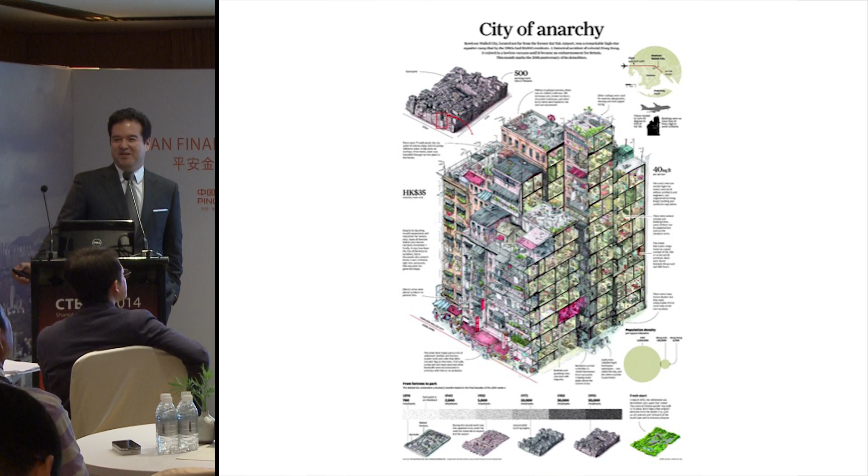This is the Kowloon Walled City, if any of you are familiar with it. It actually existed. It's been demolished, but it's the densest human habitation in history. It's 2 square meters per person. Thomas talked about some of the reasons why Ping An decided to build the tower here.

So if we think about a traditional city like New York, we define things by pedestrian proximity. It takes 15 minutes to walk from the Empire State Building to the Chrysler Building. Now, with high-speed transportation, it takes us 15 minutes to go from ICC in Hong Kong to Ping An Financial Center in Shenzhen. So it begins to redefine our understanding of proximity. Ping An and the chairman Ma Mingzhe essentially saw this tower as an extension of Hong Kong's central business district.

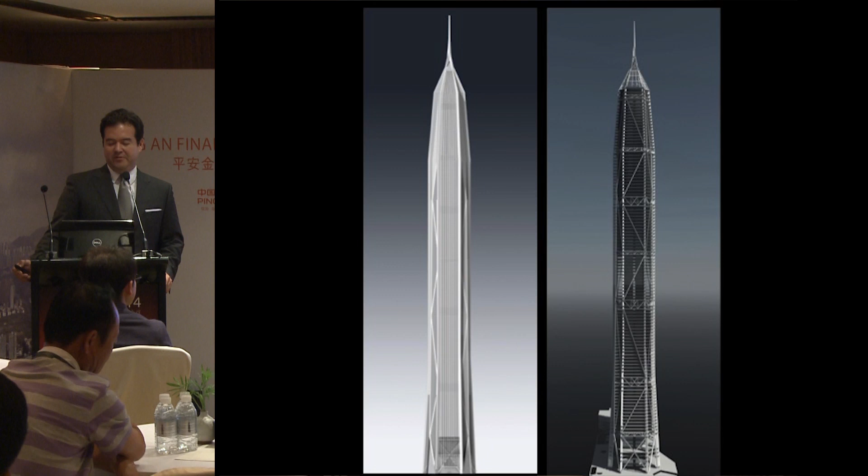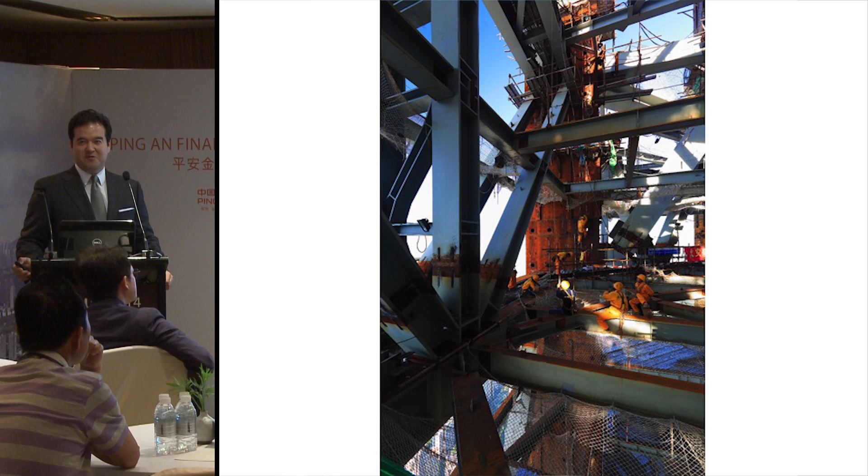Now, getting into how we do it. Structure plays a huge role when you do a tower like this. You can see commonalities already in the design of the structure with other super tall towers. I put these images side by side because the design of the exterior and the structure, and the interior as in the core, need to occur simultaneously. And here you can see it coming up. And just to give an appreciation of the scale of these structural elements, we begin to inhabit this great infrastructure.

I started talking about evolution. It's hard for me to talk about Ping An without talking about Shanghai World Financial Center and ICC in Hong Kong. I was fortunate to work on both of these projects, so taking certain elements of both, putting them together in this new tower and pulling it up to an unprecedented height. From SWFC we really learned about this idea of compacting the tall building, making its wind profile as compact as possible, and developing this really tight symbiotic relationship between the tower's structure and the tower's form.

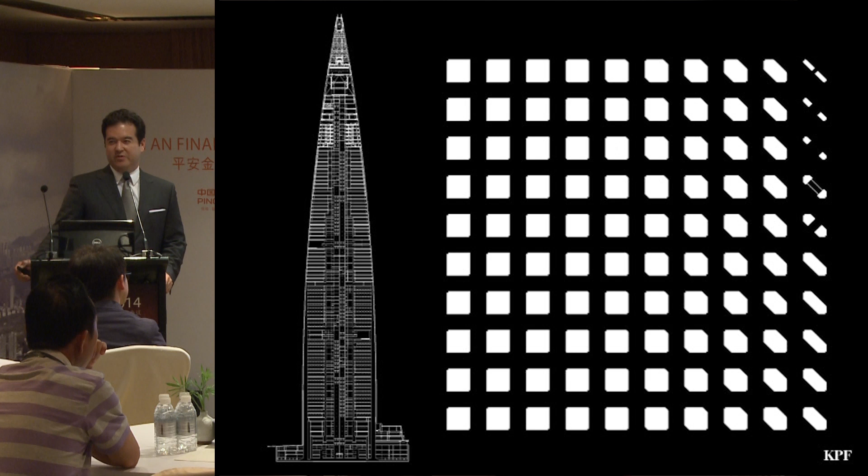And in terms of planning, and this is very important, the form of the building and the way that it transforms has to support the ideal dimensions for the functions on the inside. In this case, it's office, hotel, and observation deck.

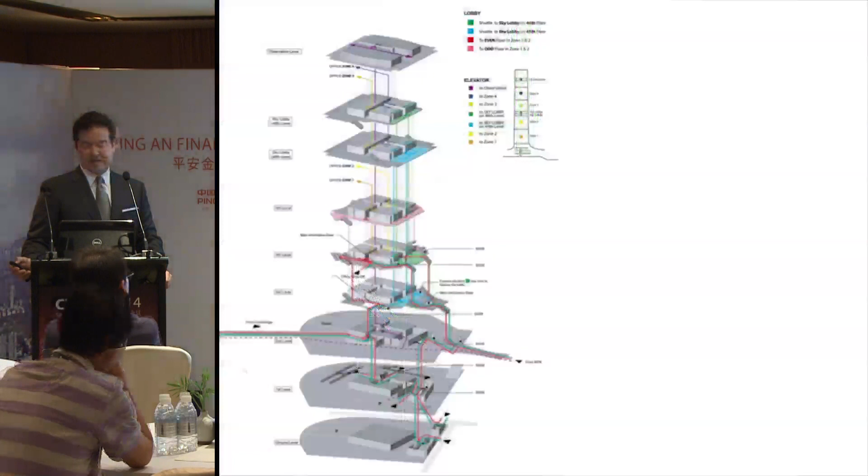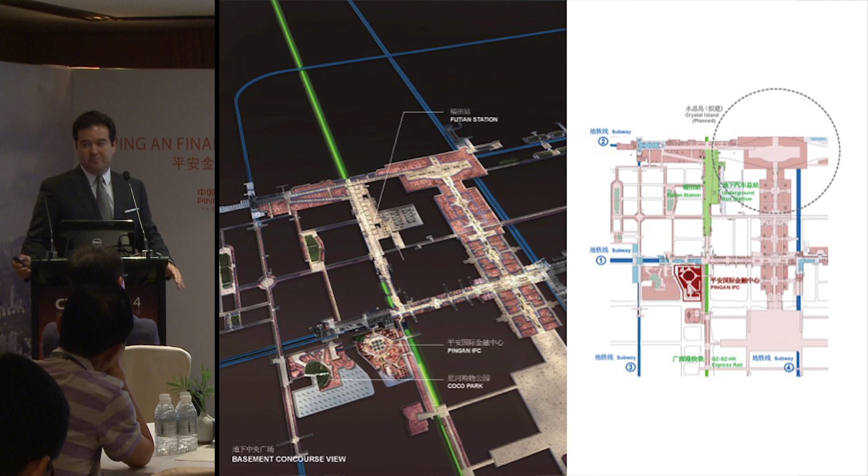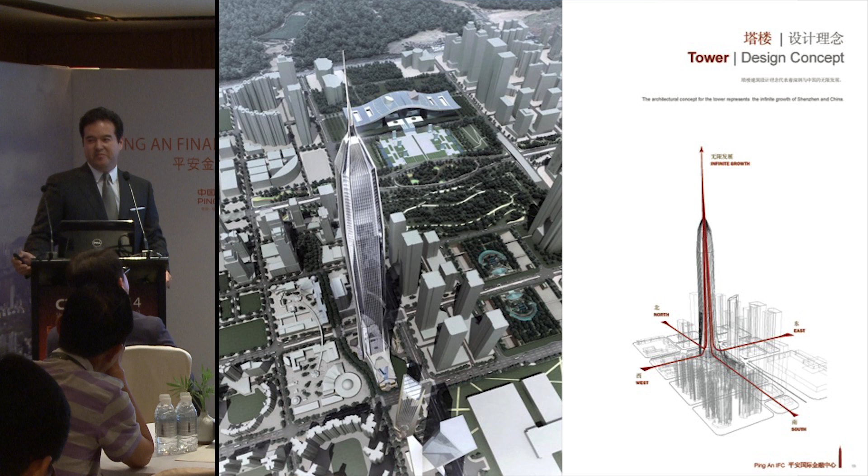The last lesson from ICC was the idea of the vertical transportation of the project being an extension of the horizontal infrastructure of the city. So when you look at Ping An, it's a little dot there, but you can see the vast network of subterranean infrastructure which supports that tall tower. So then when you look at the above grade, the tower begins to make sense because you see there's this whole world that exists below it.

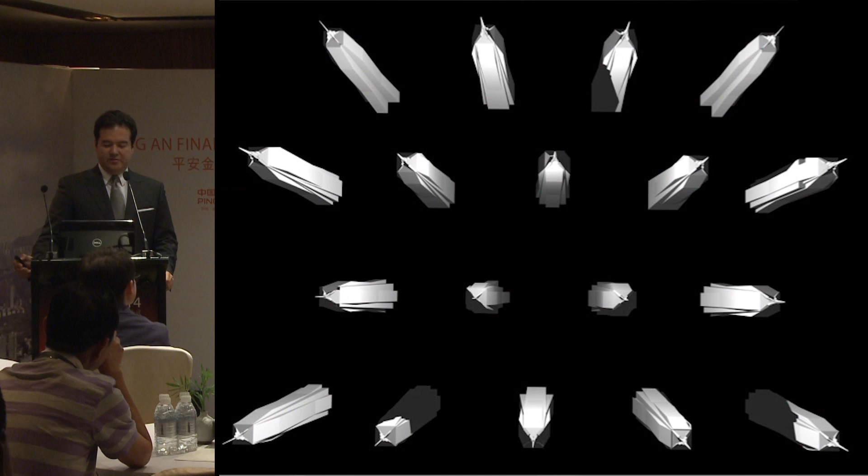Okay, so like I said, it was taking those two prototypes but pulling them to an even greater height. And in many ways, that's how I began to see the form of the tower. So how do you take something so dense and so massive, and still try to make it feel light and delicate? So the idea of pulling, stretching up the tower became the inspiration for the design. So in many ways, you start to see the form of the tower as being derived by the properties of the material. So the sort of just natural flow of the material from top to bottom.

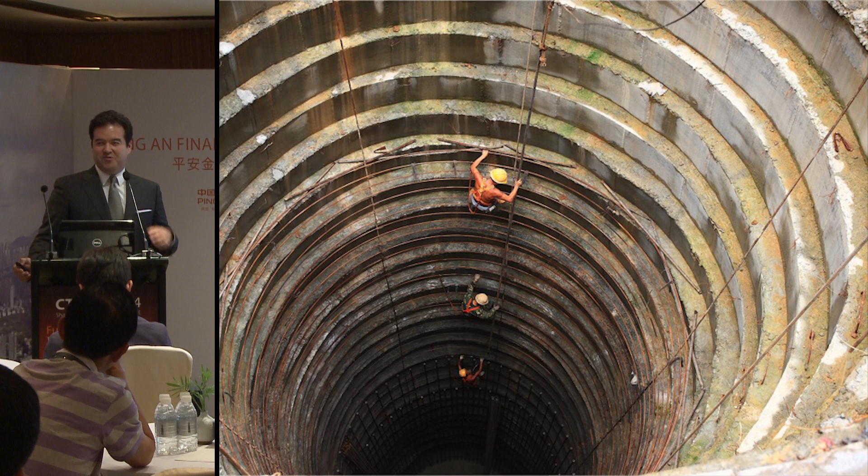Okay. And then the idea of stretching is manifested in the facade material. So after some discussions, we decided stainless steel would be the best facade material because it also emphasized the ductility or the stretchiness of the form, so it complemented the form. And that great image Thomas showed you, that stretchiness, the ductility occurs below grade as well in the form of the piles, which amazingly, and this is a photo inside of one of those, was done by hand. So there you see it.

So the idea is the tower feels poised. It's sort of strung between the earth and this point in the sky. So it's an object in equilibrium. How is most of the efficiency achieved? And I think most of the efficiency occurs in the core. So we've seen a lot of forms over the years. No one's talked about the core that much. From the point of view of a design architect, I like to see the core. Well, first of all, I think core is a terrible word, so I'm going to call it engine, because I think it's a dynamic component. It much more aptly describes the excitement of this major element in the super tall.

So when you talk about sustainability and the 600 meter tall building, I don't really see it in those terms. Sustainability is like a Toyota Prius, right? But when you're dealing with the 600 meter tall, we're talking about high performance sports cars. So the discussion becomes a little bit different. It becomes about performance.

So when we look at performance, and if you look at Audi, in 6 years between their A6 models, it's interesting because they managed to get the car to go faster. They managed to get more horsepower out of the vehicle. But at the same time, they increased the gas mileage. So it uses less gas per mile. So it became more efficient.

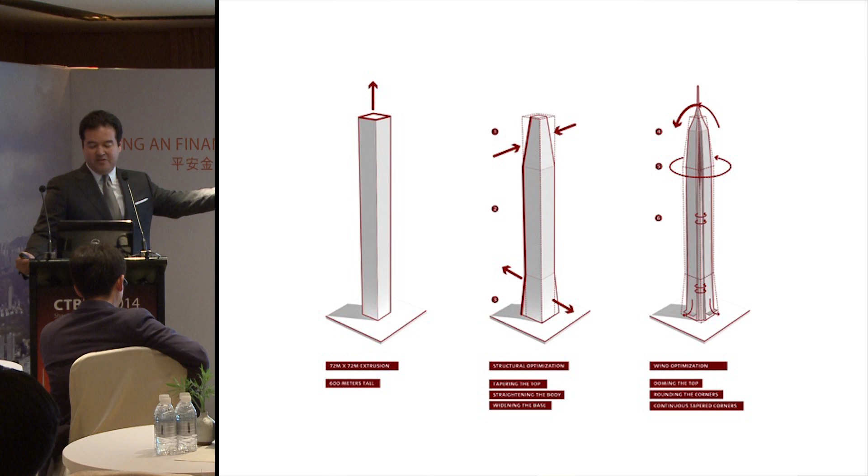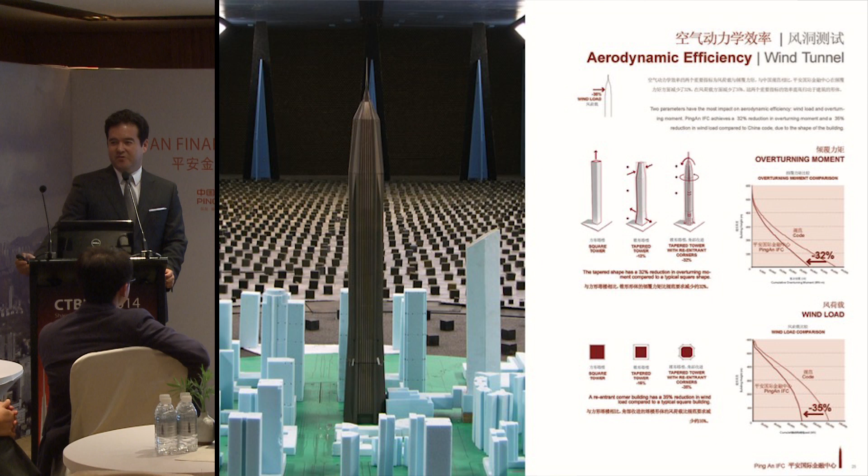So the square extrusion is perhaps the worst thing that you can do when it comes to aerodynamics. So splaying out the base, tapering the top, corner treatment, and doming of the top. Very important strategy. So by doing this, we reduced the structural force by 35%. And as things progressed, the columns started becoming bigger and bigger. It's not TT's fault, but anyhow, they became bigger and bigger.

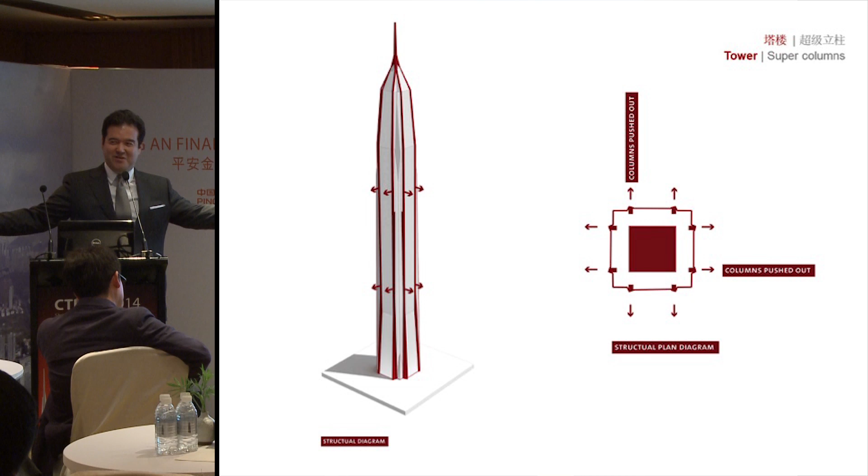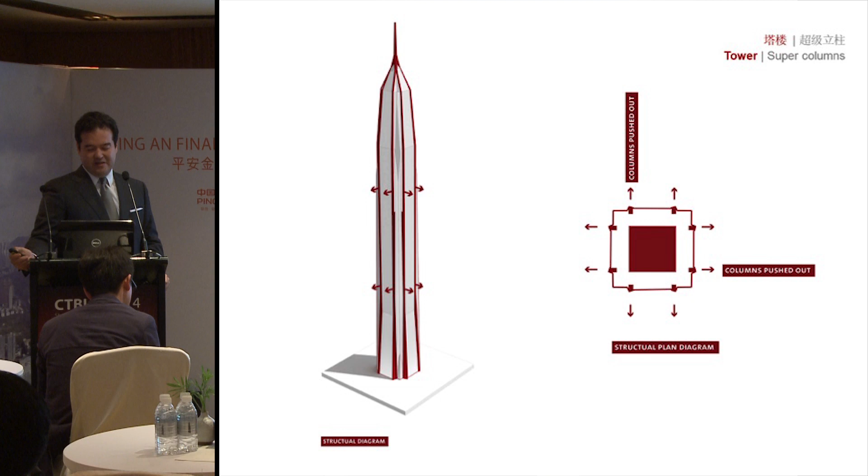Rather than pinching the internal space, we just pushed the columns outside the building, which was a great design move as well, because I think that leads to the expression and enhancement of the form. So it's thinking about internal needs. So we push the structure outwards so that we can keep the mega diagonals and the trusses tight to the curtain wall. And that just gives you an appreciation of the scale of the mega column.

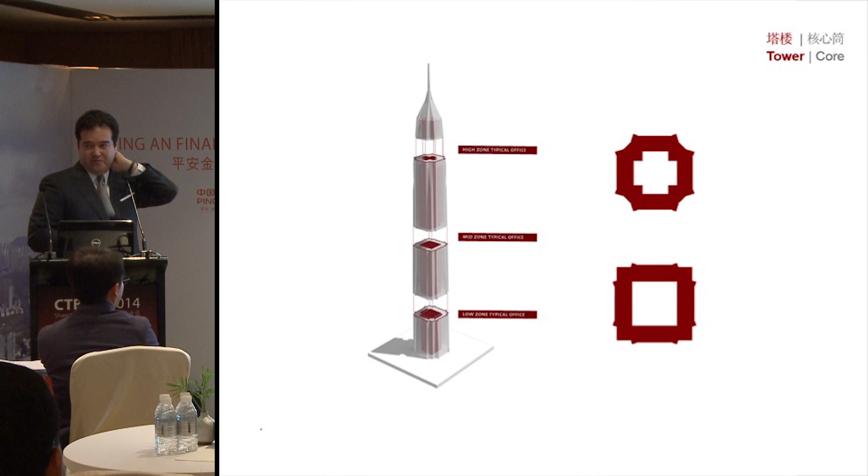Now, going back to the engine, the engine needs to be shaped. It needs to be massed at the same time that you're massing the building. So you think of them hand in hand. The challenge here was we're starting with the square floor plate, so we adopted a square core. As you go to the top of the tower, the floor profile becomes more octagonal. So the core needs to be shaped to go from a square into a cruciform. So the exterior and the core were designed in parallel, literally. And here you can see that transformation in the core.

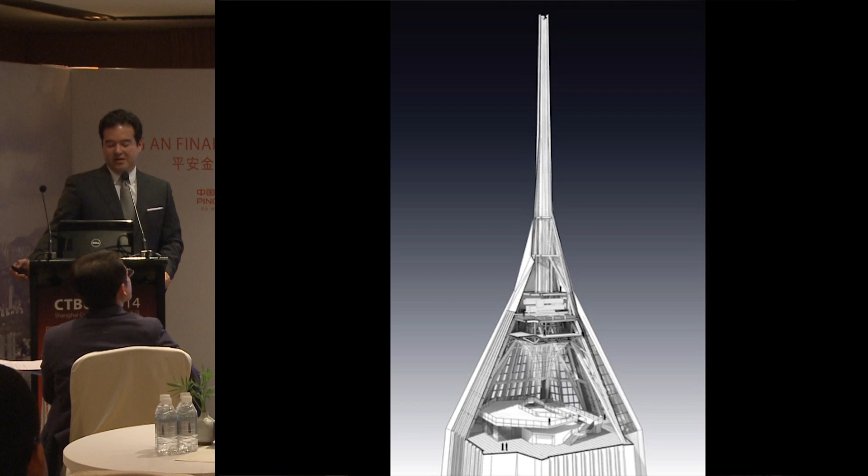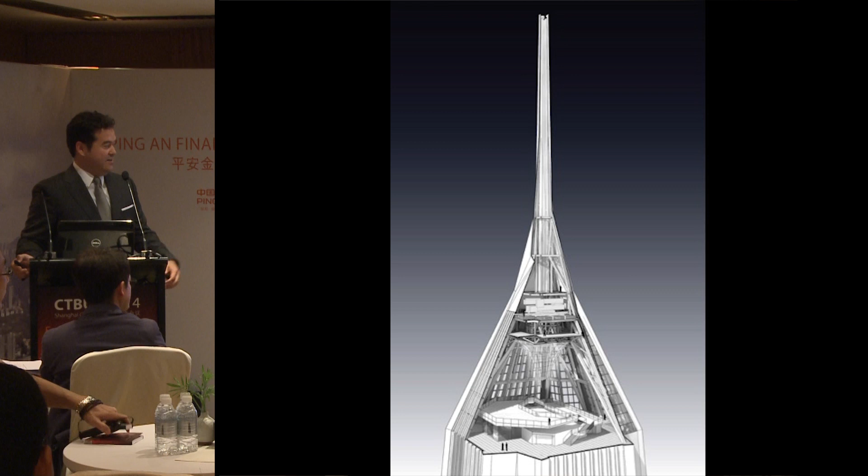Lastly, to talk about the spire, which is like the lightning rod of the project. That's where we attain the height. So it's the symbol of the tower. It feels like the only natural way to resolve a tower, but to achieve it technically, of course, extremely challenging. And you start to look at everything that you actually need to put at the top of one of these buildings, and now imagine trying to put that and still create a public space at the top. Huge challenge. But then why do it? Why go through that trouble to create the public space at the top of the tower?

And I think ultimately that's our responsibility. These tallest towers in cities perform a civic function. And so bringing people to the top of the tower should be a goal, I think, of every one of these structures. So we wanted to make the world's scariest observation deck, so we actually push out the glass in a triangular bay window. So you get a space between every little pier. You can get up and look down the facade.